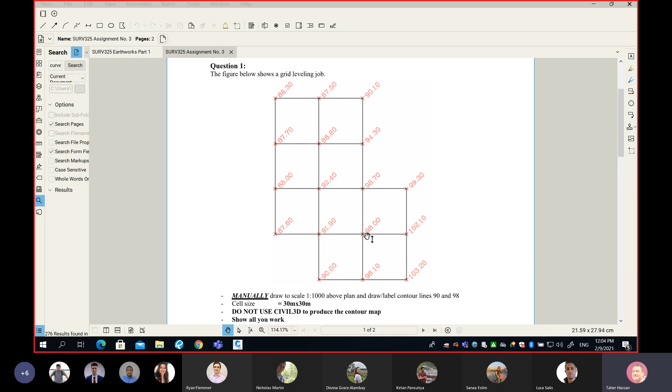Question number 1 is simply manually creating contour lines, manually. When I say manually, I'm not asking you not to use AutoCAD -- if you are very well skilled in AutoCAD, fantastic, do it on AutoCAD, but don't use Civil 3D to create contour lines for you. You want to do it on a piece of paper, great. You want to do it on CAD, great. Both are acceptable, but please don't use Civil 3D. You can use Civil 3D to check it, but not for submission.

You can see here there are a few points given, and if you want to do it on a piece of paper, you have to first draw those grid lines to the given scale. Remember, the size of the cell is 30 meters by 30 meters with a scale of 1 to 1000, so this should measure on your paper.

Every cell should measure 3 centimeter by 3 centimeter, and then you repeat those.

Someone asked me, Taher, do you want me to show you a calculation like all the numbers? You know what, you can show me a sample from every line. For example, two calculations for contour line number 90 and 98.

Remember, you are not required to create all the contour lines. That is too much work for you. I understand the time it takes to create a contour line, so please read the assignment carefully, because there is a lot of questions where the answer is already in the assignment itself.

So you can see here I'm asking for only two contour lines, 90 and 98. Don't draw all the contour lines, only 90 and 98. Please show me only a sample calculation, like how did you find two points on contour 90 and two points on contour 98.

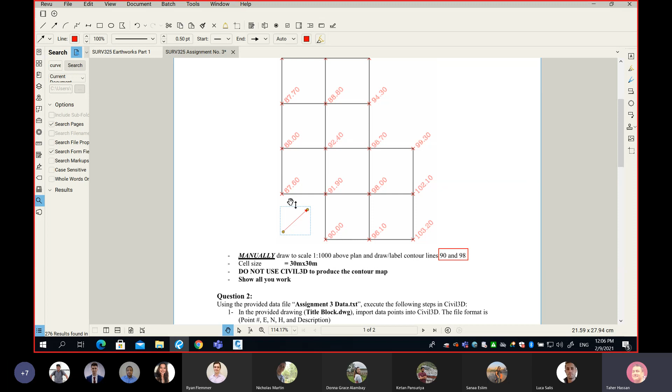The other thing is, please don't try to connect the contour line outside the data. So if you have a contour line in this area, don't, because extrapolation is wrong, we don't know. So don't do that. Just draw the contour line within the given data.

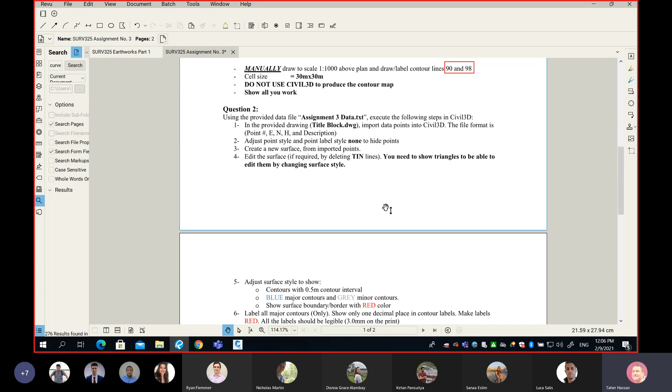Now question number two should also be straightforward. It is very similar to what we've done in class, where you need to import some surveying data, create a surface, change the style and customize it to your needs, add some labels for the contour and some spot elevation. So there is nothing super in there, okay?

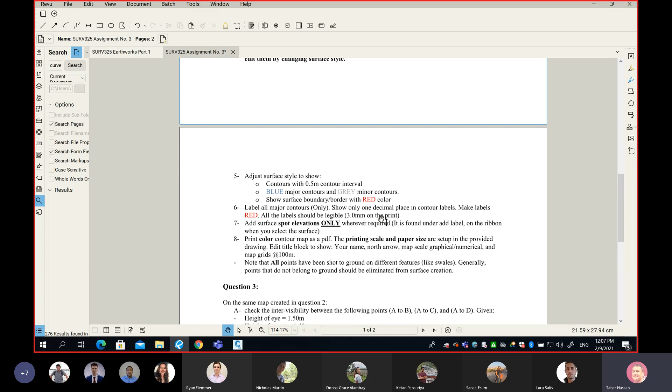And even for printing, I already created for you a layout that has a title block. You have to do a very minimum, adding the north arrow and stuff like we've done in assignment number 2.

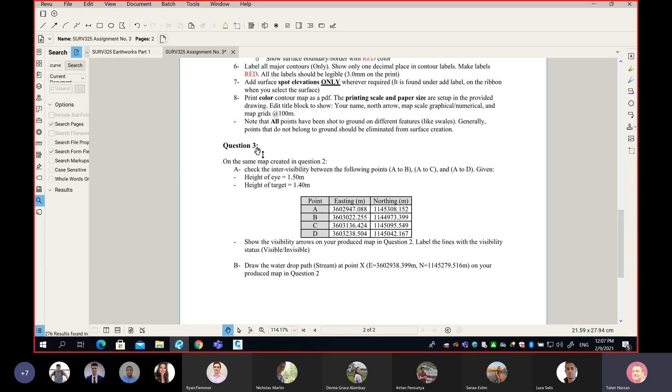Now for question number 3, which I think was troublesome for some of you: first of all, I'm not asking you to create a different map. Watch this, I said here on the same map created in question number 2, which means don't submit two different maps, just work on the same map you created in question number 2.

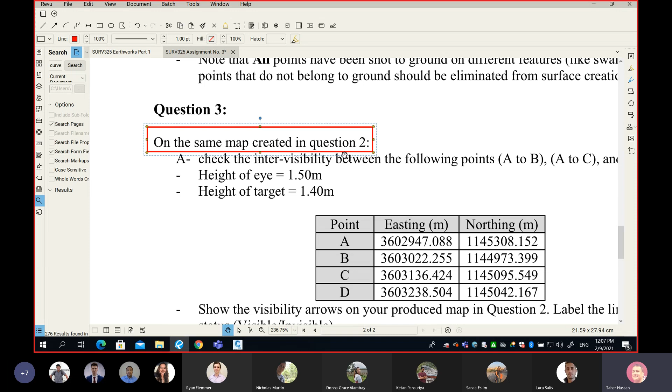Do the following: number 1 is check the intervisibility between points A to B, A to C, and A to D, where A, B, C, D are the coordinates.

I already saved you some effort. If you already started on the assignment, I give you these coordinates in a data file. So if you download the data, there is a file called extra points, and this file contains A, B, C, D, and also point X. So you can just import them and check visibility right away without having to manually type them in.

The only thing I got from students is they said, you know what Taher, every time we're trying to check the intervisibility to point D, it doesn't show, the arrow doesn't show. Did anybody in this class have the same problem?

It shows for me. Actually, look at this please. So before I released my assignment, I checked it, and you can see here to point D, everything is okay. Here's the thing, to be honest, I cannot figure out why for some people it doesn't work.

As you move your cursor and try to click on point D, sometimes the arrow just is hidden and doesn't show. If this is the case, please try to do it as close as possible. Move your cursor a little bit right and left until you see the visibility arrow or the check.

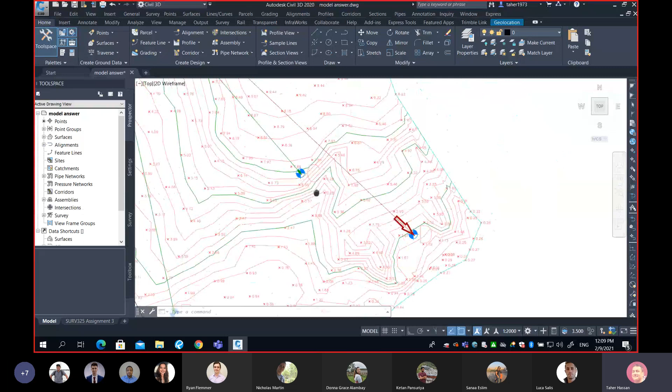Are you guys following? You can see here everything on my screen is working. For points A, B, and C it's okay, it's visible. How about point D? There is a blockage for this line of sight somewhere here. So again, bottom line is, if this arrow doesn't show for point D, please do it as close as possible, and that's really what I wanted for the assignment.

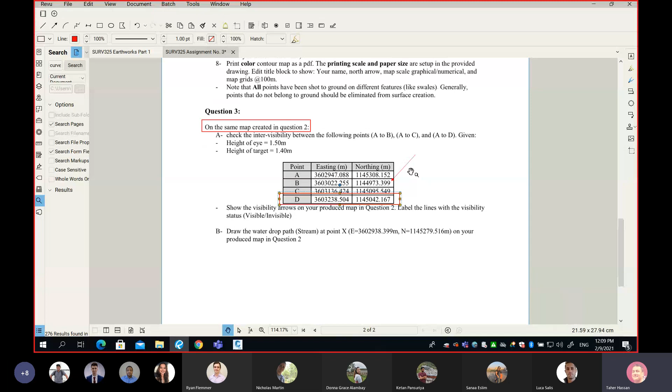It should be straightforward. If you attended the class and did the training, you should be able to do 100% of the assignment. So some of you asked me, okay, so what is my final delivery?

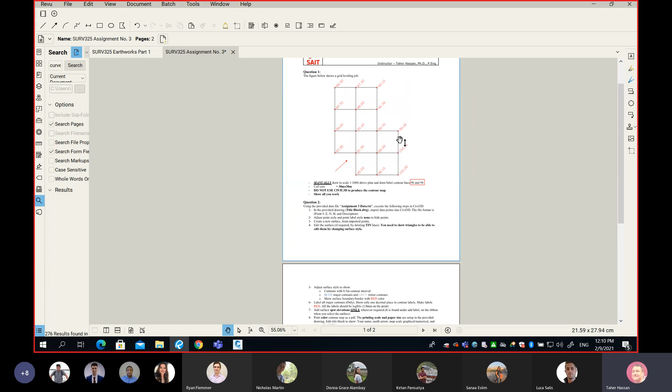Should I give you a CAD file or what? Really, what I'm asking at this point in time is to submit a PDF file. And I know some of you will do this as one PDF file, so you can print a PDF file for question number 2 and question number 3.

And if you've done this manually, you can scan your hand sketch that has the contour line. Bottom line is, if I have so many PDF files, can I combine them into a single PDF file? What do you think?

Yes, you can. So that's why - over the years, I discovered when I don't limit the number of PDF files, some students aren't educated on how to combine files, and I get flooded with lots of PDF files. That's why on submission I limit it to a single PDF file, where students combine everything into one file and submit only that to me.

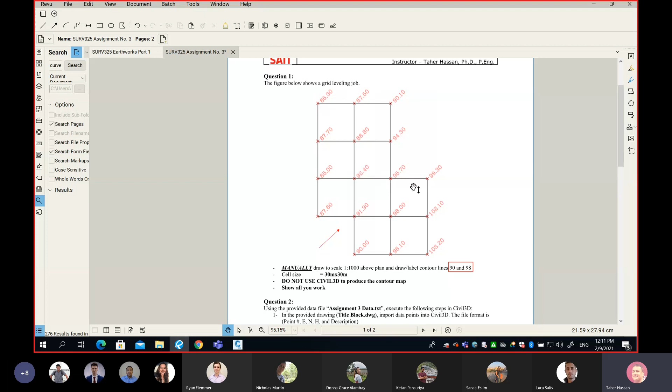Hopefully you have clear instructions to submit your assignment properly. Any questions for assignment number 3 so far before we start today's class?

Let's see, Luca. I think Matthew was before me. Okay, thank you so much.

Matt asked if I could go over how to change the label styles, for question 2. You mean the contour lines? Yeah, like for spot elevations, or if you label your contours, the major ones, how to change that.

Matt, I don't know if I'm going to be mean if I tell you this was on purpose. The thing is, yes, I'm teaching you a little bit about Civil 3D and trying to give you a good foundation, but also intentionally I want you to go play, try to figure it out, because this figure-it-out process will teach you something. So don't think of me as a mean instructor, but that was intentionally left for you. You need to figure it out and use resources.

Search YouTube, find the resources - it's not going to take a thousand hours, but it's a learning process. When you graduate and I'm not around the corner, you need to find the information on your own. I'm hoping that in my class we do some training that gives you a key or clue on where to go and what to do. And if you can't, then ask me and I'll help you out, but try to make some effort on your own. Hopefully this isn't a bad response for you.

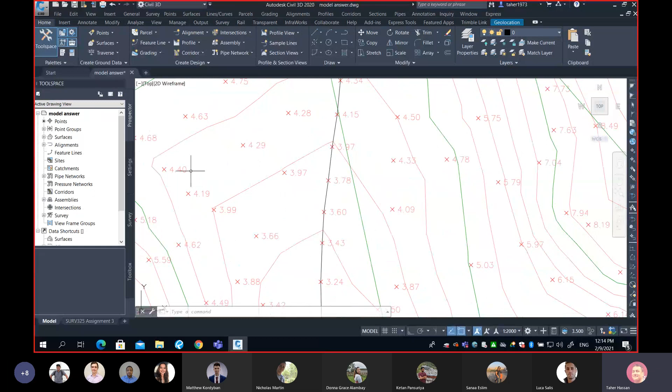So Luca's asking where we should add spot elevation since there's no direction on the assignment for where to add it. I said before, guys, a couple things you need to notice: number one, I don't want to see anybody submitting the map this way - you can see my contour line and my data together. As I discussed, the data is not required, so you want to turn off the data.

I know some of you still struggle to remember how to turn off your data. The way you do it is go to the point group properties, then choose 'none' for both the point label and the point style. Now you can see my surveying data is not there anymore.

Number two, Luca is asking where I should add spot elevation. I said it in class - I feel very bad when I ask students to add spot elevation and they just go: here's my surface, I click on it, go to label, add spot elevation, and place them randomly - one, two, three, four, five, six, seven. That is not correct.

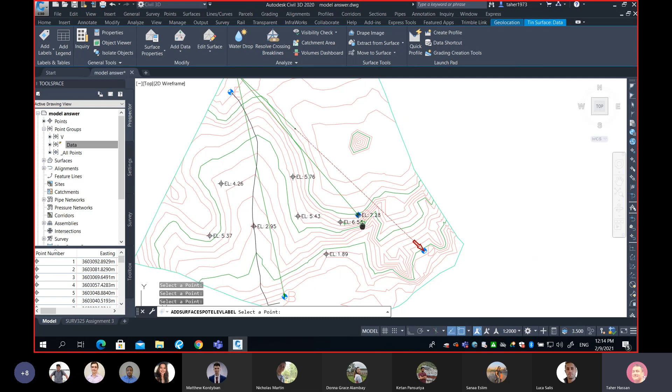Spot elevations are added for a purpose, and that purpose is to remove confusion. For example, when you look here, it looks like there's confusion - we don't know if this is a depression or a summit, whereas as soon as you place a spot elevation, it tells you right away that this is a summit. Also, along the border area, like this area here, it looks like there's confusion.

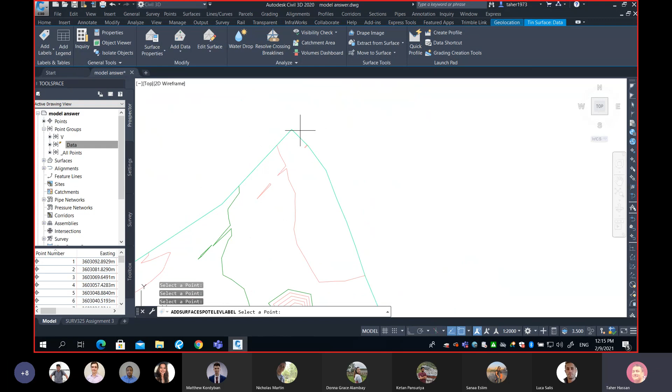We don't know, so we place a spot elevation. The answer is very simple: every time you see a closed contour line, there is a spot elevation, like here. And every time you go along the border and you have a confusion, like here, you add the spot elevation. Did I answer your question, Luca? Yes, thank you. No problem. Any other question before we look at our discussion today?

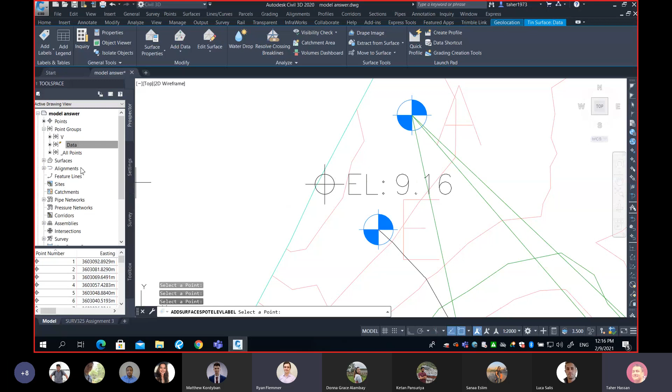Quick question for you: I uploaded both of those point things you gave us into one file. Is that a big deal? Do you know what I mean? Look up my tool space, please. Is that what you've done? You brought the two data sets, because I gave you two files, one for the data and one for the extra points. Yeah, so when I uploaded them, I just clicked both and labeled it as one file. I should have obviously made two.

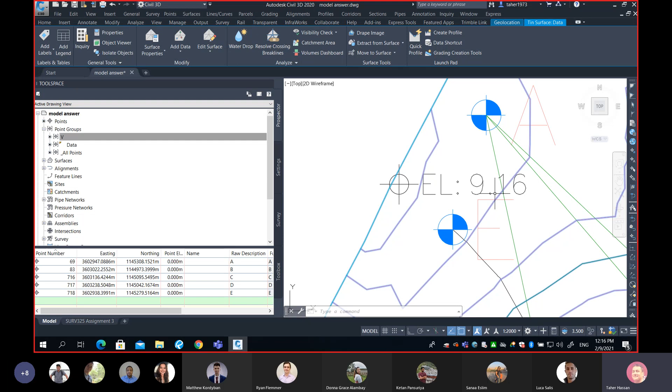You know what happens? Those extra points, the 5 points, they have no elevation. So you will not get the same contour lines, because some of the points will have 0 elevation, and those are not really surveying data. These points, I want to check the visibility between them. So you can do what I did: import them in a different point group, and when you create your surface, do not include those extra points in your surface creation.

I'm hoping you haven't done this. Yeah, I definitely didn't do it the right way the first time and got a decent way. Is there a way of extrapolating them out now, or do I have to restart?

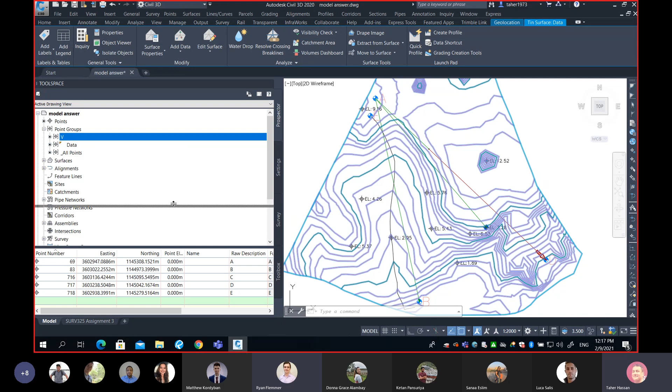Sure, I can give you help for this one. All you have to do is go to your data, and remember your data right now has those 5 points. Then what you do is watch this: as you click here on the point elevation, you click on this column. And you know what happens when you click on the column? The software will sort all the data based on elevation.

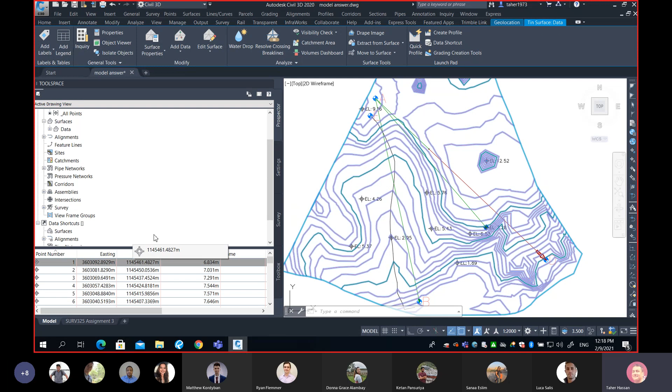Since those 5 points have 0 elevation, they will come to the top. Once they come to the top, you just mark them, right click, and delete. When you delete them, your surface will get this yellow triangle. You know how to remove this yellow triangle? We said it last class. Update your surface, or right click and take those 5 points out of your surface definition, then you can import them one more time, but in a separate point group. Is that clear? Awesome.

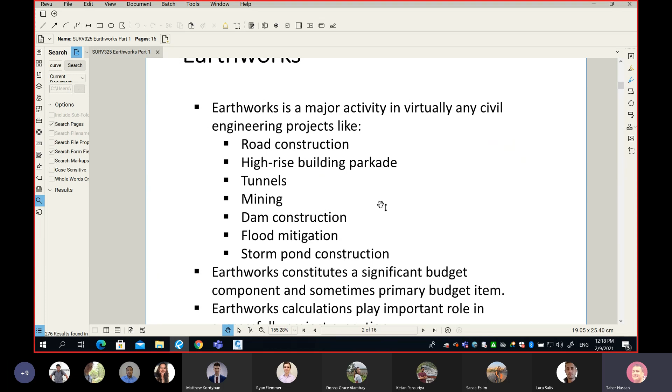Now, today's discussion is about one very important topic in civil engineering, which is cut and fill, sometimes called earthworks. I can tell you, every single project in civil engineering will have some amount of earthworks. You will have to move your soil left and right, north and south, until you get your project done. Sometimes the soil work is too much, sometimes too little, but every single project will have some movement of soil. In some projects earthwork is the main budget item, and sometimes it is not. For example, in road construction, what do you think?

In road construction, yes, there are some items like asphalt and some items like lighting. However, soil work is still too much money.

For example, I remember when I worked with the West LRT, and the West LRT goes from downtown all the way to the west end of the city. If you have taken the C-Train to the west side, you will see it goes initially from downtown on grade, then it takes a series of bridges until it hits Bowness Road. Then on Bowness Road it goes on grade, then into a tunnel into Westbrook Station. From Westbrook Station, it goes into an open trench parallel to 17th Avenue Southwest.

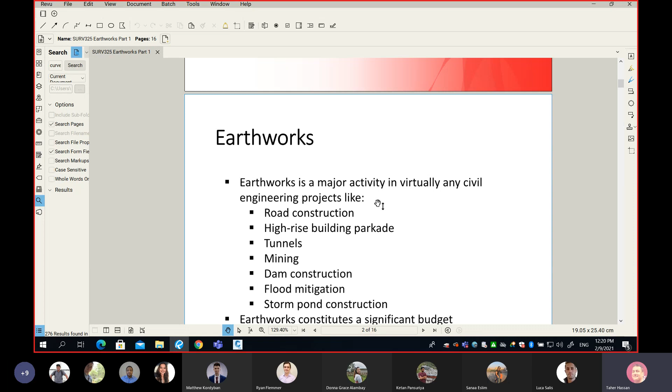So there was a lot of money spent when it comes to the West LRT.

Other projects you might think don't have any cut and fill, like a high-rise building. But as we discussed earlier, every time you build a high-rise building, you need to maintain parking or a parkade for the users of the building. It's very expensive to go horizontally because there isn't enough space around the high-rise building, so typically you build the parkade under the building. To do that, you must excavate down and make a big hole in the ground.

Tunnels and mining, that's another main thing. When you create a tunnel or do mining, there's a lot of excavation.

Dam construction, when you build a dam there are different kinds. One of them is just making an embankment of soil, so that contains a lot of fill. Flood mitigation, when you build a diversion channel to take the water and move it somewhere else, also involves earthwork, as does storm pond construction. The list can go on and on to show you that almost every single project in civil engineering will contain some sort of earthwork.

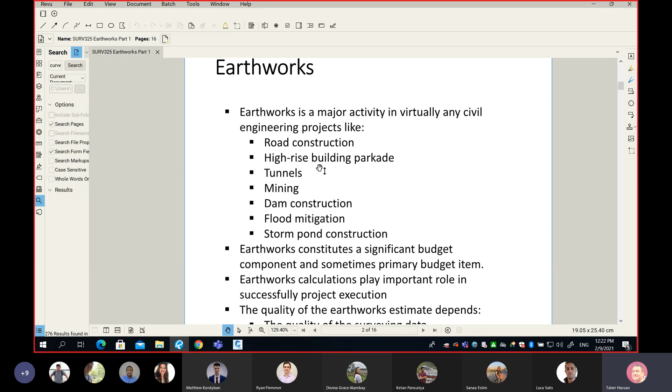As I said, earthwork is sometimes a main budget item. Probably 50 to 60% of the money goes into soil work, and sometimes not that much, sometimes very little.

I want to mention something, and this statement probably won't be 100% clear right now, but it will look a lot clearer during the next 4 to 6 hours. The quality of the earthwork estimates depends on 3 factors.

Number one, which I bet you can all guess, is the quality of the surveying data. I need to do all the surveying the right way, get the right instrument height, the right reflector height, center my prism, make sure the rod is vertical. These are all things you learn in the first year to get a precise measurement of your 3-dimensional data.

That's one thing, but that's only part of the story. What people don't recognize is that this is not the only factor, and by ignoring the other factors they end up with bad results even though they have very good quality surveying data. That's what I will try to emphasize over the next 6 hours.

Another main factor that controls the quality of your final estimate is the method you use for calculation. We can use one method or another, and the choice of method will give you slightly different results, controlling the quality of your results. In addition, every method comes with some assumptions, as you'll see some of them today, and your assumptions in calculation will also affect the quality of the results.

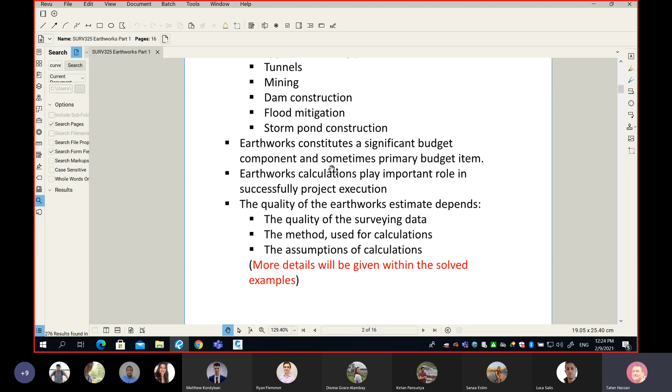Before I start the calculations, unlike the discussion we had before, which for about 2 weeks focused on surfaces and Civil 3D where the work was done primarily by Civil 3D, this part of the course goes back to doing a lot of calculation by hand.

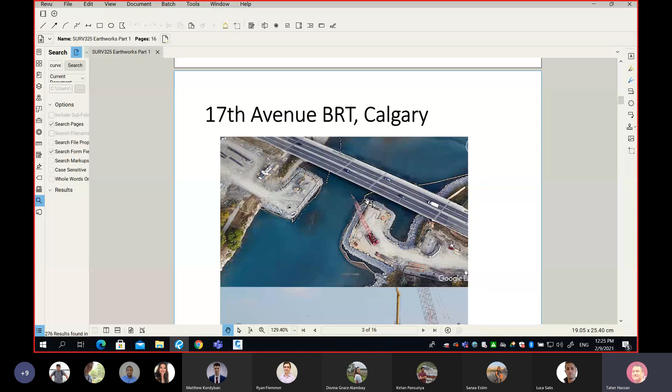Now, before I start showing you the calculations, I have a few projects here in Calgary just to show you the importance of cut and fill, since it happens in every project. One of the projects I've seen was the West LRT, with a big contractor for cut and fill, or moving earth, called KLS.

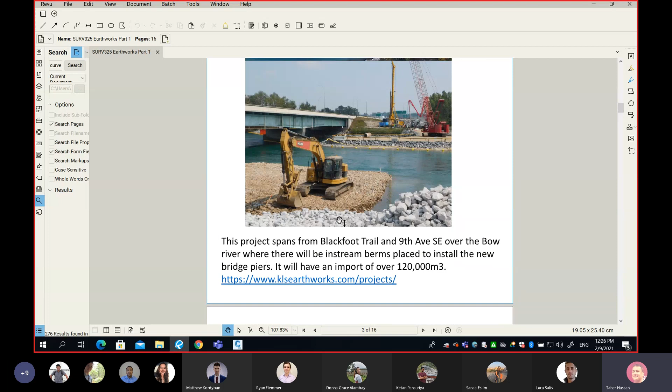One interesting project is the 17th Avenue Rapid Transit. Recently the city of Calgary extended transit to the east side of the city, where buses go quickly from downtown along 17th Avenue Southeast, I think to Chestermere. To do that, they needed to do some crossing for the river, and they had to do a fill here. The amount reported was roughly 120,000 cubic meters.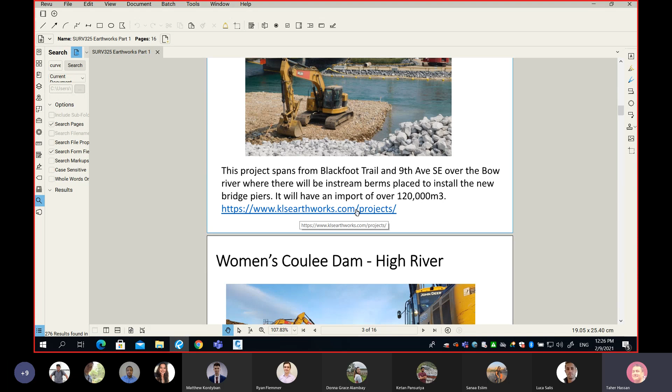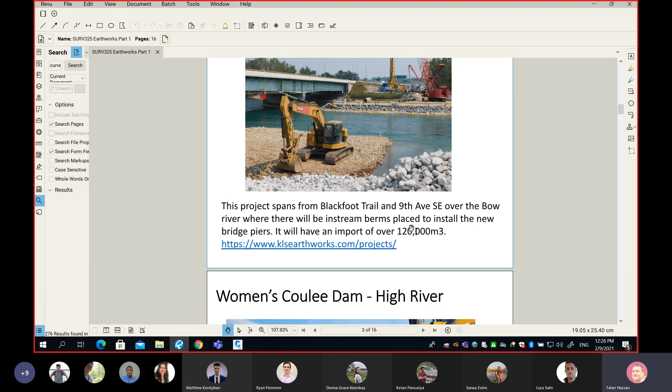By the way, this company is also the main contractor for the West LRT cut and fill. If you lived in Calgary in 2010 and went to the west side near Walmart, where Westbrook Station is, probably now you know where the station is. The entire station was built underground. If you've seen this big hole 10 years ago before they filled it and built the station and backfilled, it was a huge hole in the ground. Right now it's kind of a parking area with some landscaping, but at that time it was just a big hole in the ground.

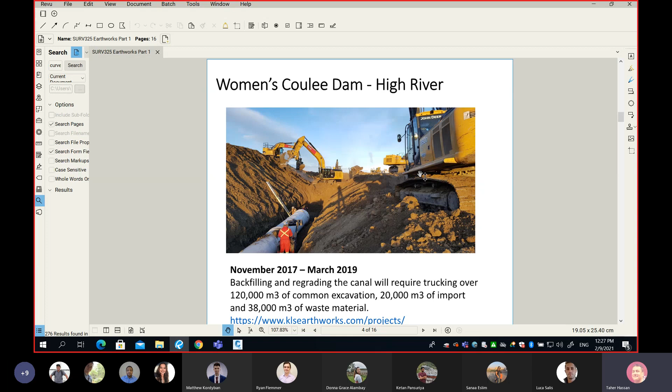The second project, quickly, is not in Calgary but in High River. It's called the Women's Coulee Dam, and this was part of flood mitigation. In 2013, if you've been in Calgary, we had a flood and the city was in disaster — bridges were swept away, and even the area southwest of Calgary, High River, was affected. There were houses flooding, houses moving with the river. That's why the government did some flood mitigation, creating diversion channels and installing pipes to take water from one area to another without flooding the city. Again, another big project.

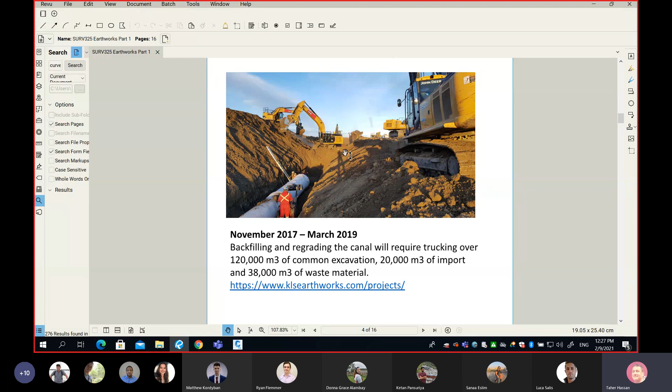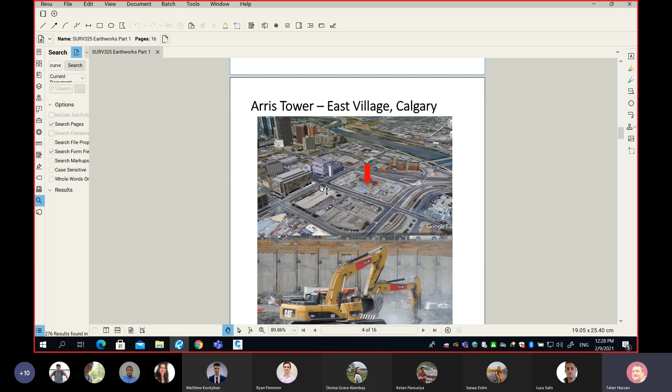The third one, the last on my slide, is a project I think is still ongoing, but I believe they've finished the cut and fill phase already. It's called Arris Tower, in the East Village in Calgary. There's a 3D aerial view showing the location of the tower. To put things in perspective, this is our Calgary Central Library, and the tower is to the north of it — a big project, a big complex. It's going to be, I think, the highest residential building in Calgary by the time it's finished.

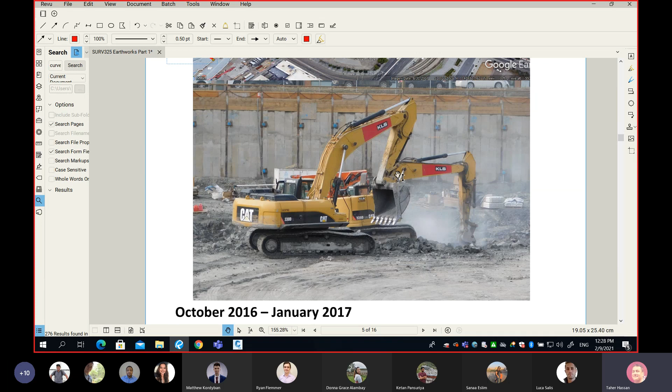You guys remember we had the same discussion about a month ago when we talked about deformation monitoring, when we build retaining walls and keep excavating until we reach the right elevation, then build our structure up, and then simply backfill. I'm not going to repeat myself here, but this is another example of how earthwork is part of any civil engineering project.

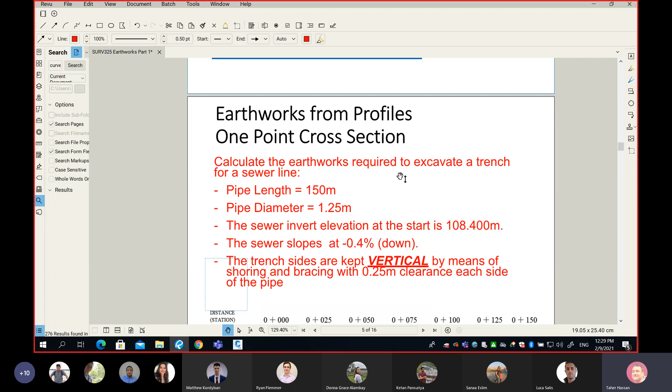Now we are going to start right away, without going into theory first. I'm going to teach you the theory together with solved examples, which I think is a bit different than what I did before. I have a few numerical examples here, and probably during the reading week I will provide you with more examples by numbers.

Before I start, as we progress in our course, you'll see we have different methods to find cut and fill. Some are based on profile, so we can extract cut and fill from the profile. Some require finding cut and fill from cross sections, and some are based on grading. As we progress, you'll get to know when we can find the volume from profiles, from cross sections, and from grading. Let's start.

So here is our first example. We're trying to build a sewer line. That's our first project. There is some information given to you in this numerical example.

Number one is the length of the pipe, which is 150 meters. The pipe diameter is 1.25 meters. The sewer invert elevation, and if you don't know what invert is, please wait, it's an elevation on the pipe, at the start is 108.4. The sewer slopes down by 0.4%.

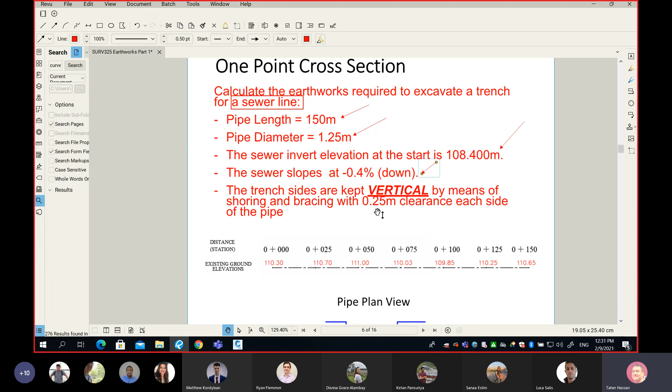Another piece of information: the trench sides are kept vertical by means of shoring and bracing, with a 0.25 meter clearance on each side.

Now, before I show you what every piece of information means, I want you to understand that this information is not really surveying information. I'm asking you, in surveying, do we decide the slope of the sewer? No, we don't. That's not our business in surveying.

Maybe you yourself, in other classes, if you are part of the municipal section or option, you will learn how to find or how to decide the sewer slope. Really, all this information you see here is not really surveying.

I will make it clear. I will box them out. And that's why, please don't ever think that in my course you will be asked to tell me how much the pipe length should be, or the pipe diameter, or the pipe elevation. All that information will be given to you. Those are design information, not surveying information.

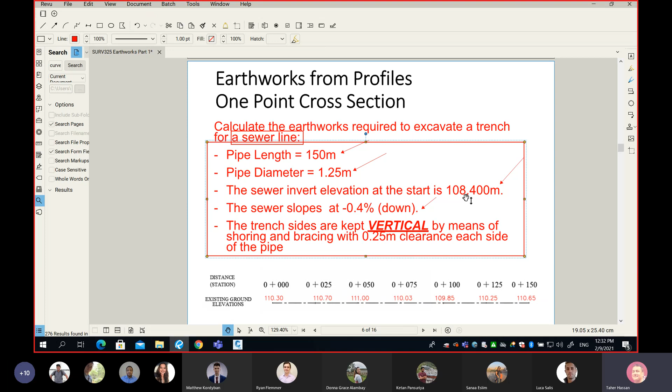Really, in surveying, what we do is this. This part here is the surveying part, where we measure the elevations along the center line.

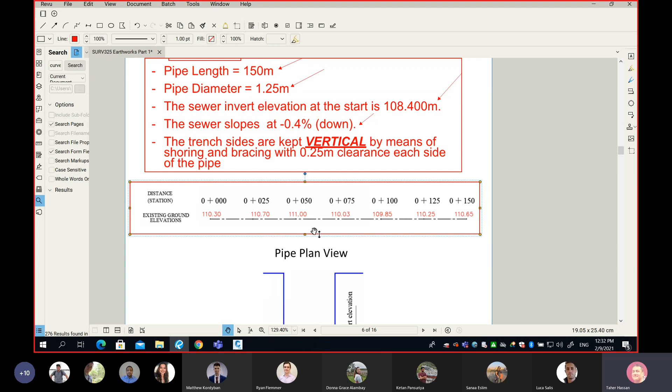Please think about this center line here as a plan view. We're able to measure the elevation of all these points, every constant distance between the points. For example, we measure the elevation at the start of the pipe, then after 25 meters we measure the elevation of the ground again, and so on until the end of the pipe at 150. So those numbers in red are all existing ground elevation.

How about those numbers in black, which look kind of weird? It says 0 plus 0, 0, 0, then 0 plus 0, 25, and so on all the way to 0 plus 150. We call them stations.

I know the word station is kind of new for you, since you guys are not municipal section or option, and that's why you're unfamiliar with this name. So I want you to think about station as equal to distance.

But it's not a straight distance. It's distance measured from the start of your project, however it is not a straight distance, it's a distance along the center line of your project. In this example, since my pipe is a straight line, it's the same thing as distance.

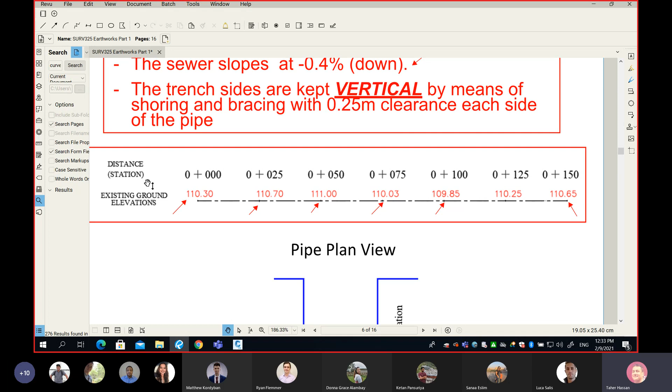However, in general, station applies on roads, where you have a straight line, a curve, then a straight line, a curve, and so on. Distance or station is not a straight distance from the start of your road, it is measured along the center line of your road. Hopefully this is enough for you to know about the station.

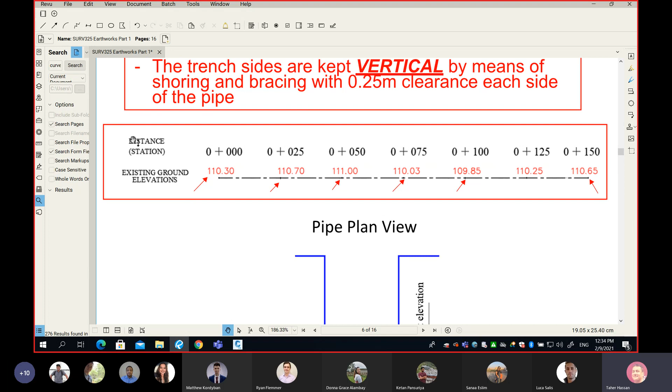Now let's look at the cross section, because it will tell you a lot about what we're trying to do. So here is our pipe. That's our project: we're trying to place and install this sewer pipe of diameter 1.25 meters.

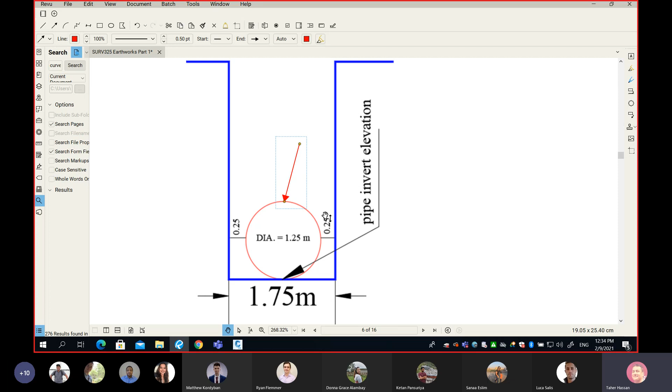And remember, that is not surveying information. We do not decide the diameter of the pipe in surveying, somebody else will have to do that. Then we also have to leave a quarter meter on each side because it's impossible to make a trench exactly the same width as the pipe. I think this makes sense for you.

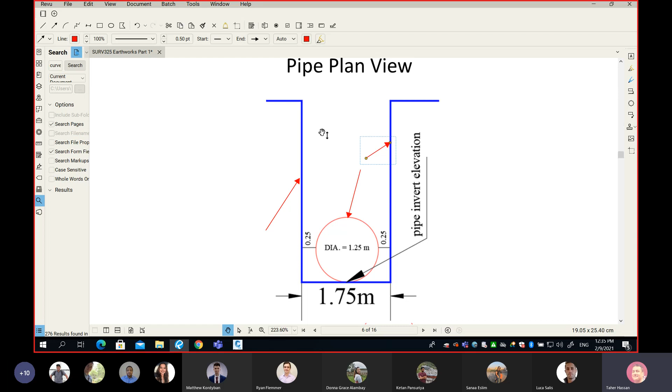Then the next part is we maintain the sides of the excavation, this side here and this side here, vertical. And you guys know soil by itself doesn't stay vertical, right? So what we have to do is add shoring and cross braces to maintain those sides vertical. Basically we're trying to make a trench, and the total width of the trench is very simple.

It is the diameter of the pipe added to that clearance of 1/4 meter each side. So my total width of excavation is 1.75.

Now look at this. Where is the existing ground? So my ground before I install my pipe, it was at this elevation here. Probably I'll give it a different line type. So this is my ground, and my surveyor simply placed the rod and found for me the elevation at this point.

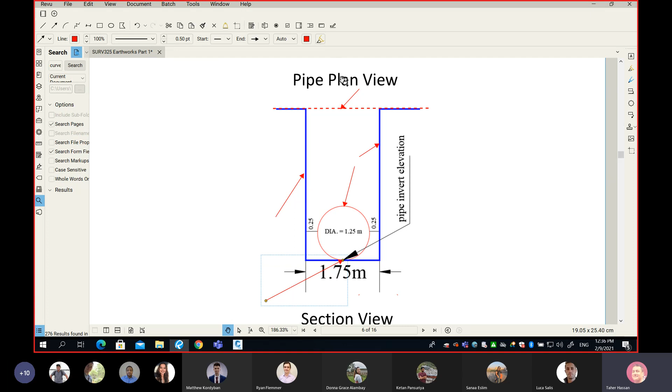Now a designer will simply do something else. We'll say, okay, let's put our pipe here at this elevation. And what do we call this elevation? Invert elevation. There are so many factors, and it's not really our topic in surveying, because you guys have enough information right now in civil engineering to know why this pipe is not really on the outside. Can anybody tell me, why don't we really place the sewer on top of the earth here?

It'll freeze. Yeah, it will freeze for sure. Look at how lovely our weather is, especially this week and probably next week. We're getting minus 36 at night. So for sure, because this pipe will contain some fluid, it will freeze. And if this pipe freezes, this is a disaster by all means, because simply you will have a back sewer in your house, and that's a disaster. Okay, so that's a big deal.

The other thing is, can it be just like 1 meter below the surface? I'm going to save your time. No, it cannot be, because it has to be deep enough not to feel the traffic on top. Otherwise, if you make your pipe shallow, maybe the pipe will be broken, and sometimes we see that, especially for water main. Anyway, that's not my discussion in surveying.

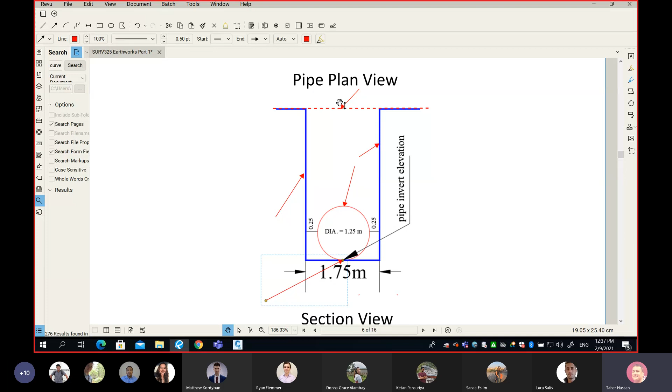I want you guys to feel that we need to place this pipe at a given elevation by the designer. Now my job here in the surveying class is to tell them how many cubic meters it will take to build or install the pipe, or to cut. So next part, to solve this problem, here is how we do it.

We need to draw something called a profile. Look at this name. We're going to estimate the earthwork from profiles. And our first step to do that, we need to draw the profile. So here is your final product. So your profile at the end, after you do it, it will look like this.

Let me show what it means, profile. A profile is very simple. The profile is you simply cut through the center line of your project and then look from the side view. Cut through the center line of your project, then look from the side view. And look at this place.

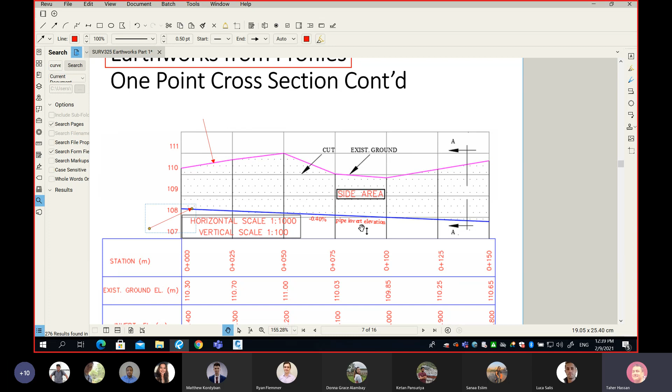You will see here we have two lines. This line here in magenta shows you the change of the existing ground along the center line. So the ground goes up, down, down, and then up. So this is the change of my existing ground. Together with the existing ground, there is another line here in blue, which is the invert of your pipe. And so we call this thing a profile.

Now I know that drawing the profile for some of you could be a very trivial process, very simple, but I can tell you, for many of you, you don't know how to draw the profile the right way or to scale. I'm going to explain this in 5 minutes, and if you're sure you know what I'm saying, you can just enjoy your time. My discussion within 5 minutes is to show, for somebody who doesn't know, how to draw the profile the right way.

Now the profile in simple terms is simply a curve, a relationship between two different variables. On the horizontal axis here is simply the station or the distance. So we want to see how the elevation will change with the change of distance from the start of your project. And simply this is a profile.

Then really to draw any relationship, you must draw the grid lines. So I'm referring to these grid lines, this line here and this line over there, and all the horizontal lines. How can we draw those grid lines with the right scale? Here is my answer.

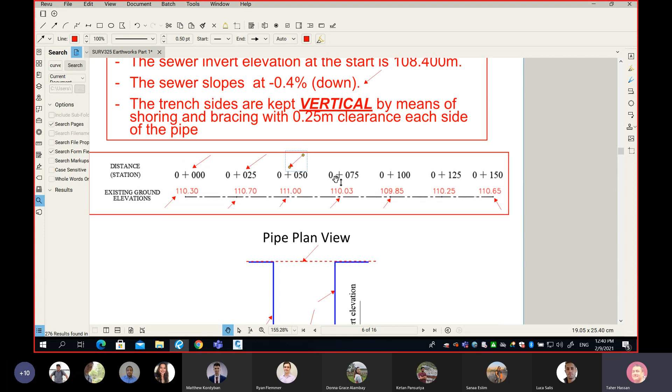If you try to do the same thing on AutoCAD, that is a piece of cake, because in AutoCAD we simply draw things to scale. So if I have 25 meter spacing between our data, it was 0, 25, 50, and so on. So on your CAD, you want to draw the first vertical line, and then offset it 25 meter, and you can build all those vertical lines.

Easy peasy. How about the horizontal lines? You want to draw a first line, then offset this line by a distance. Typically this vertical grid line is at every 1 meter, and on AutoCAD we multiply it by a number. The horizontal is straightforward - if I have offset of 25 meter, you can see here 0, 25, 50. I draw the first line, I offset 25 meter.

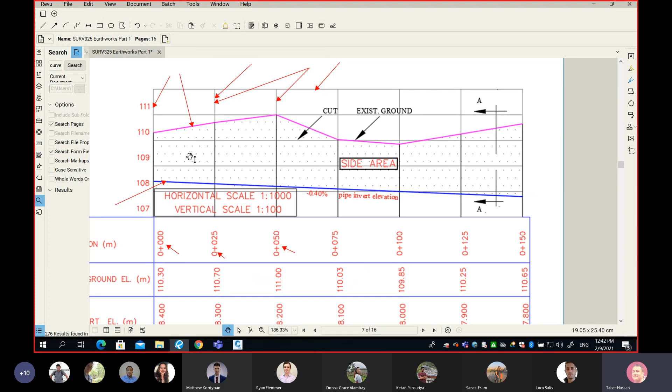The vertical is a little bit tricky because we do not draw horizontal and vertical to the same scale. We have to distort the vertical scale. The reason we distort the vertical scale is to be able to see elevation difference. Imagine, what if I don't distort the vertical scale? Can anybody tell me how the magenta line would look like if I don't distort the scale? It would be like a straight line. Exactly, you won't see any change in elevation.

And I have a good example for you. You guys know between Calgary and Edmonton, what is the distance roughly, not to the millimeter, just to a kilometer? About 300 kilometers, that's the distance between Calgary and Edmonton. You know how much the elevation difference between Calgary and Edmonton is? It's only 300 meter. Think about it this way: I want to represent 300 meter and 300 kilometer with the same scale. What happens is, if you go with the horizontal, then you see no change of elevation.

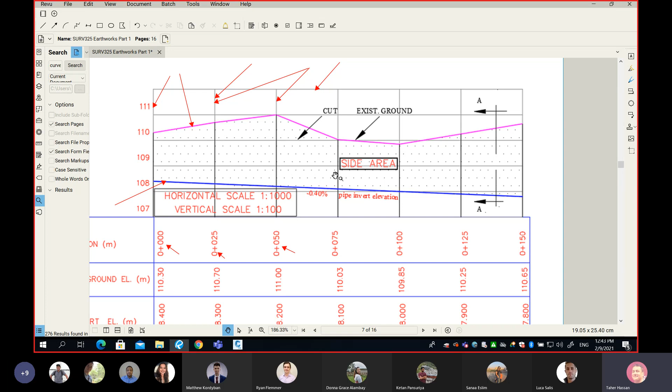That's why ever since, highway engineers and designers always create a profile with distorted scale. What does it mean, distorted scale? It means I'm going to use two scales. That is unlike plan view - plan views have the same scale. If you go any direction, plan views and maps have the same scale. Profiles don't. Profiles have a horizontal scale and vertical scale.

Here is the universal rule. People agreed on this rule a long time ago, and it's kind of universal - almost every engineer or designer trying to create a profile will use this rule. The rule is very simple: you take the horizontal scale, you multiply it times 10. For example, horizontal scale 1 to 1000, then the vertical would be 1 to 100.

I'm going to ask you, what if the horizontal scale is 1 to 500? Can anybody tell me what will be the vertical scale? 1 to 50. Thank you so much, that's correct.

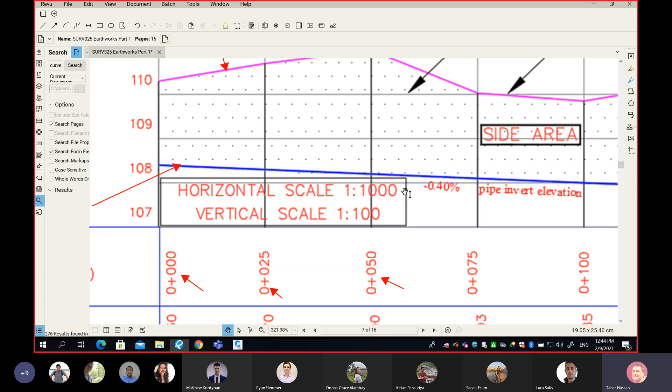Okay, and how does this affect my drawing in CAD? Very simple. In CAD, all you have to do is work between these points, between these lines. I'm going to dimension it here - between this line, in CAD, it's supposed to be 1 meter, just 1 meter. But because we're using a different scale, on AutoCAD we simply multiply the 1 meter by 10. So I draw a line and then multiply the offset by 10 meter. So on AutoCAD, I multiply by 10, I offset by 10 meter, and so on.

Okay, how about on a piece of paper? This discussion was on AutoCAD. How about if I try to do the same profile on a piece of paper with the same scale? Watch this. If you want to do this on a piece of paper, which you're allowed to do, then I don't have AutoCAD, so I simply have to use the scale right away. And what happens here is, watch this.

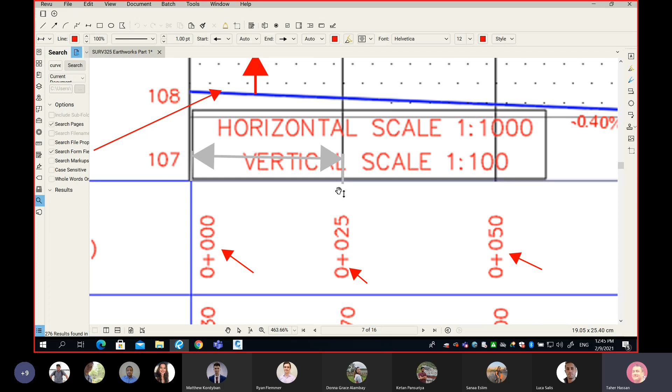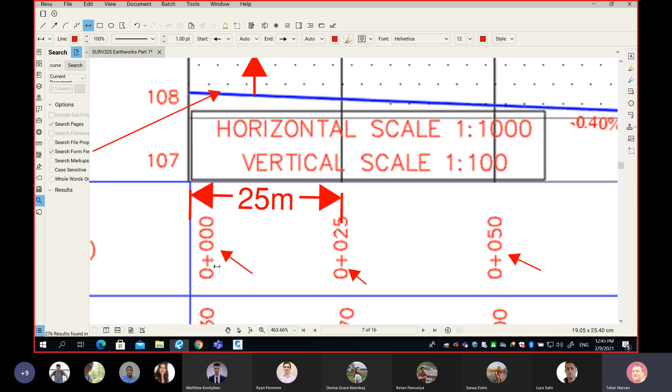So we know this distance in real life - between this point and this point - is how much? Do we know the distance? Yes, we know it is 25 meter, that's in real life. I'm going to move it here so you guys can see. So we know this distance in real life is 25 meter, and if we're doing CAD, then we use 25 meter. I'm asking you, what about if we do it on a piece of paper with a scale of 1 to 1000? Can anybody tell me what should be the distance between the two lines on the piece of paper? I'll do it one more time here - on your piece of paper, trying to draw those two lines, can anybody tell me how much?

2.5 centimeters, thank you sir. That is 100% correct. So if you do it on a piece of paper, you want to do 2.5 centimeters because the scale is 1 to 1000.

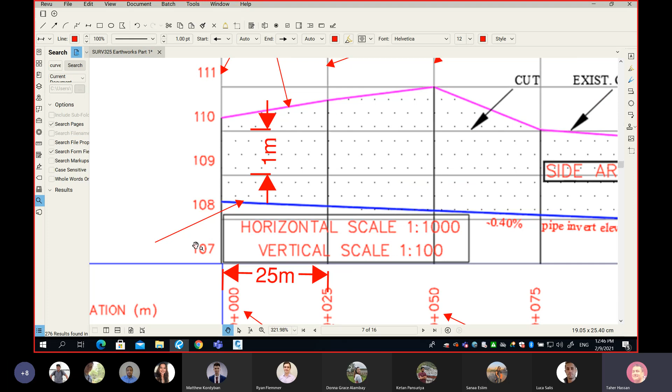How about this distance here between 109 and 110? This distance here, in reality, is 1 meter. How about on paper? Let's do it one more time. Look at the scale - the scale is 1 to 100. So on a piece of paper, you should make two lines with a distance of 1 centimeter. Why centimeter? Because 1 centimeter with a scale of 1 to 100 will be 1 meter in real life.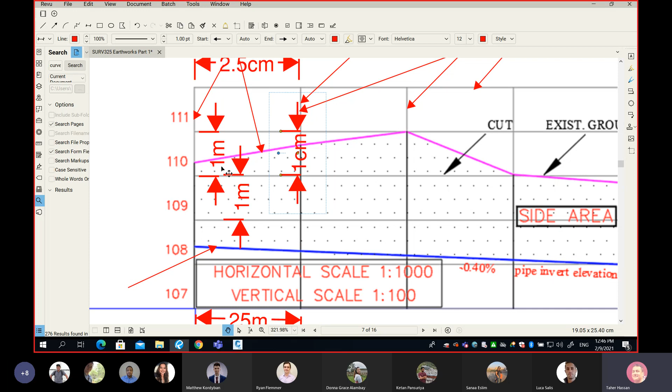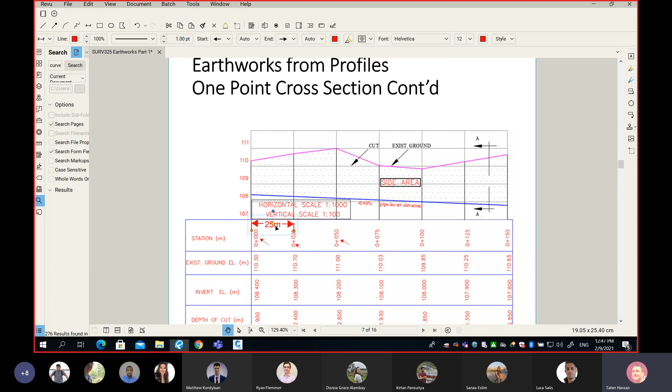Once you're able to plot the grid, your life is super easy, because all you have to do is simply plot these points. I'll show you which points, then connect them together, and this will create the profile. I'm trying to clean things up so you guys can see better, okay?

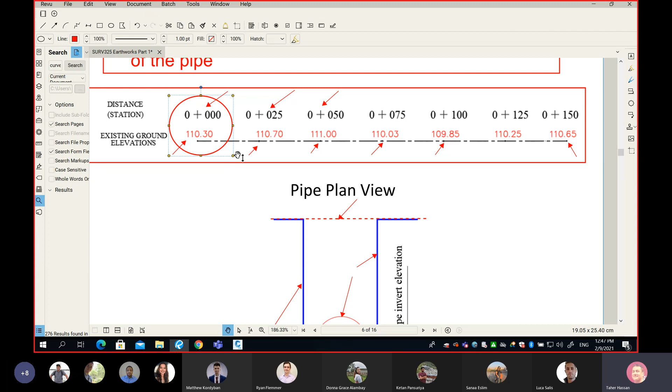Now watch this. Imagine the grid is there and you don't have anything yet for the magenta or the blue. At the first point, let's go back to our data - elevation is equal to 110.3 and the station is 0. So all you have to do is go down here, and at station 0, you go to 110.3 and simply draw this point here. This is 0 distance or station, plus 110.3.

Next one, let's go here. The next one is 110.7 at distance 25. So I go here, on 25, I go up and I simply locate 110.7. And so on and so forth. So once you plot all these points and connect them together, it will draw your existing ground.

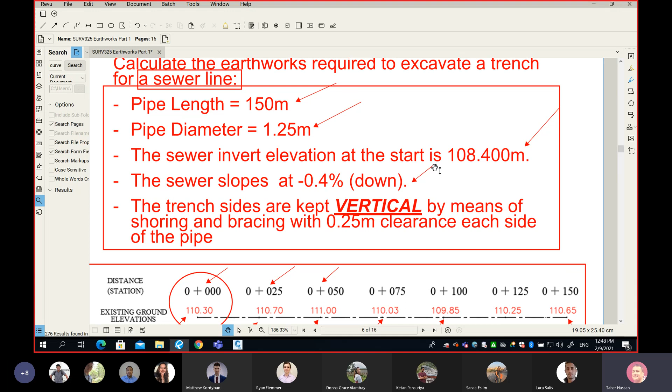How about the pipe? The pipe needs some work, huh? Because we know the elevation at the start, which here is 108.4. So on the pipe, I know only one point, which is here - the elevation of the pipe at the start, 108.4. How about the other points?

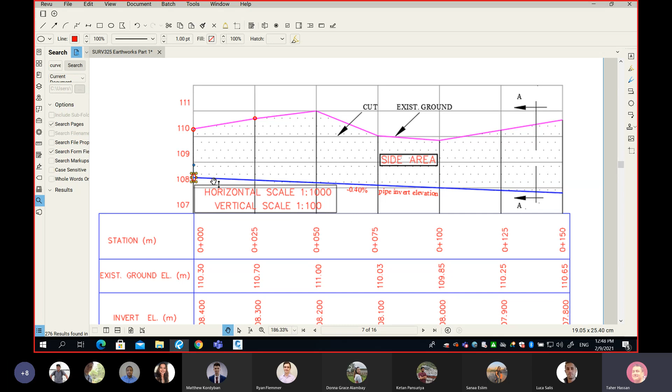Very simple, not very difficult. I'm going to show you right now how to estimate the elevation on the pipe, based on the elevation at the start together with the slope of your pipe. Now before I do that, I want you guys to imagine or understand this.

Look at this - at this point in time, do I have these numbers? I'm going to cover these numbers. I'm asking you, do I have them right now? I don't have them. I don't have the elevation on the pipe every 25 meters. All I know is the elevation of the pipe at the beginning, 108.4, and the slope is minus 0.4%. So these numbers are not known.

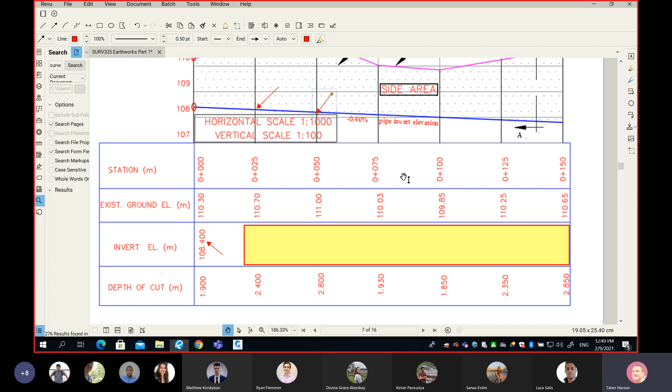Now, can we do it? Can we figure out the elevation on the pipe every 25 meters, if I know the start is 108.4 and the slope is minus 0.4%? Yes, we can - very simple, by the way. I'll show you an example.

So I'm going to write my example here. For example, let's say I want to find the elevation here - this number for me is unknown, I want to find it. Watch this, it's as simple as: the elevation here is equal to 108.4, this is where I start, and then minus - why is it minus? Because the slope of the sewer is downward.

And I want to tell you something - all the sewers, all of them, must slope down. Not a single sewer can slope up. You guys know why, huh? Why must all the sewers slope down? You know that - all the sewers must slope down simply because the sewer is what's called open channel flow.

It is not pressurized. What does that mean? You must provide a slope for the flow of the fluids. There must be a slope, and the slope must be down, just like rivers. I think about the sewer as a river, because the river will have to slope down from the upper elevation to the lower elevation. That's why it's minus.

Now the next one is the slope. How much is my slope? I'm going to write the number, please correct me if I'm wrong. I'm going to say minus 0.4, and that's the slope. Is that right or wrong? Wrong, because the slope is 0.4%. The way I have it right now is 40%, because 0.4 means 40%. However, the right way is to divide by 100, because the slope is 0.4%.

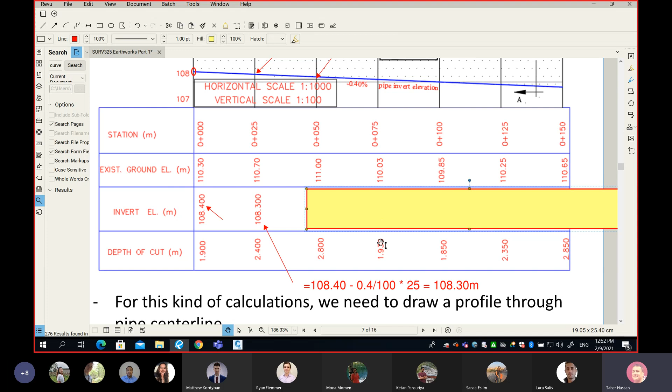How about if I want to do the next number, which is this one here? I do the same thing. I'll just move my arrow and show you. All you have to do is the same equation. This number is... can anybody help me? This number is 50. That's correct, thank you. So we go 50, and this number is 20. I can simply move my box, and you can see, good news, it's 108.20, 108.20.

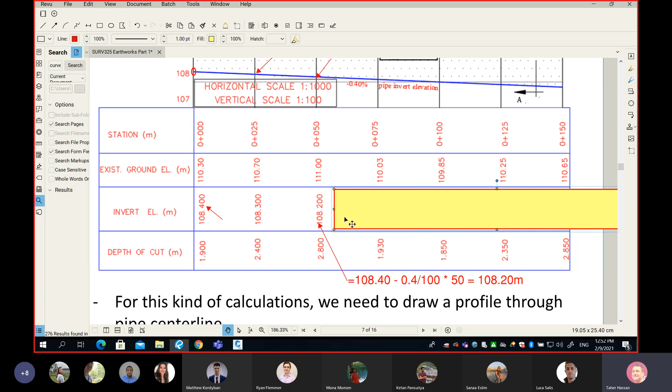So this is one way, and I know this way is not super scientific for second-year CVT, but I myself have a different method. It's not really scientific, it's just my own method that helps me estimate elevations even quicker. It's based on the understanding of the slope. Okay, watch this please.

Can anybody tell me what a 1% slope means in plain English? Here is how it means: a 1% slope means if you go 100 meters, and the slope is negative, you drop in elevation by 1 meter. This is the meaning of 1%.

How about if my slope is 0.4%? Can anybody tell me, if I go 100 meters, how much do I lose in elevation? Four? How much? 4 meters? Not really, it's only 0.4 meter. It is 0.4%, look at this. This is how we do it. So this line here slopes 0.4%. Let's write it down: 0.4%, this is the slope of the line. We go 100 meters and we lose 0.4 meter.

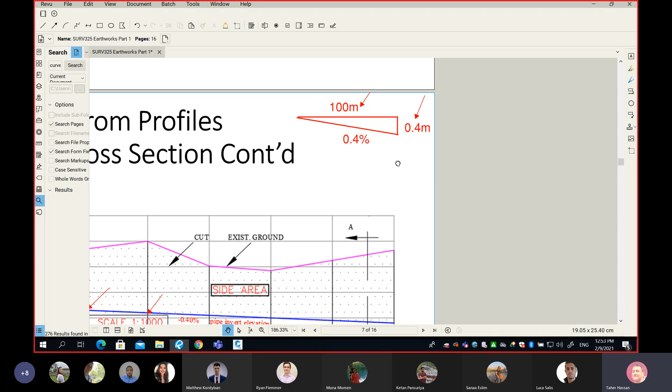Now I'm asking you, between the points, this distance which keeps repeating, how much is it? 25 only. And what does it mean? It means we need to see after 25 meters. So here is my distance, 25 meters. How much do I lose? If I lose 0.4 after 100 meters, how much would I lose after 25? This is very simple, how much is this distance? 0.1, thank you so much. Very simple, because 25 is a quarter of 100, so you lose a quarter of 0.4, which is 0.1.

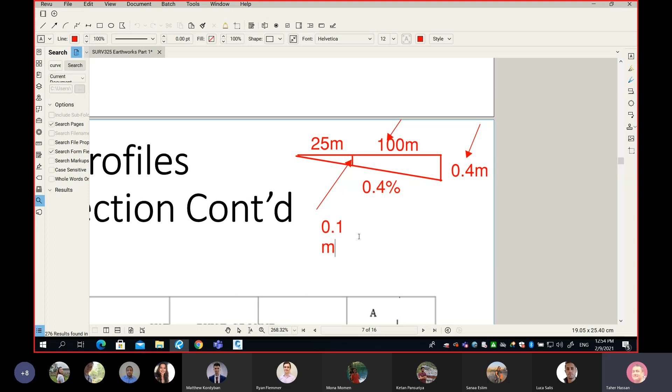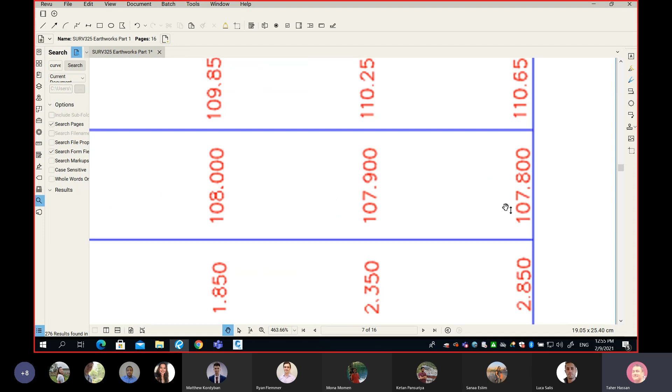Some of you will say, okay Taher, this is trivial. But yes, it's trivial, it saves you a bunch of time. Watch this: if I apply the same thing here with a distance of 25 meters, I don't have to do any of that. You can see, I go from 108.4, lose 0.1, get 108.3, lose 0.1, 108.2, 108.1, 108, 107.9, and 107.8. You can see it just speeds up the results. But again, if you're not comfortable with this method, the other way will save your life.

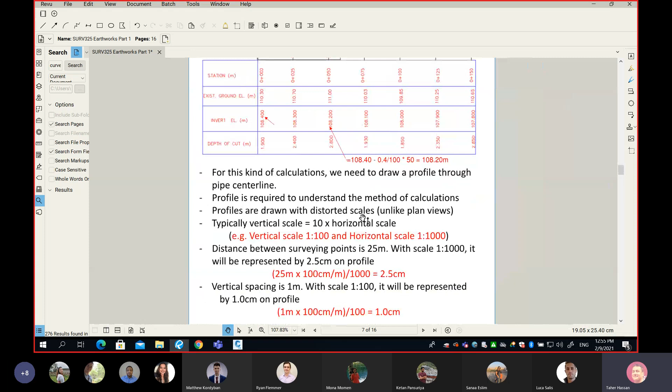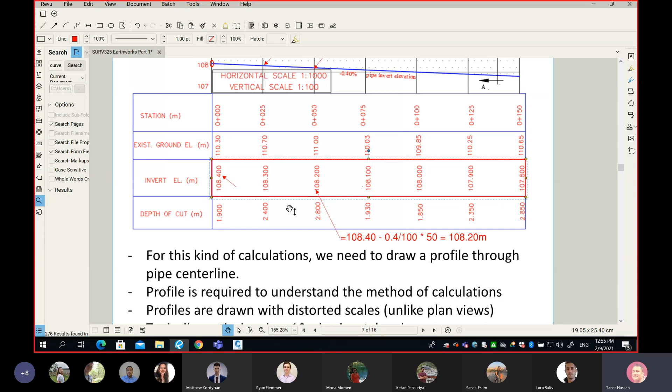This is okay. Now I think it's time to break. Remember, before we break, we are able to finish and fill the table, because after the break we will continue on the table. Any question so far before we break?